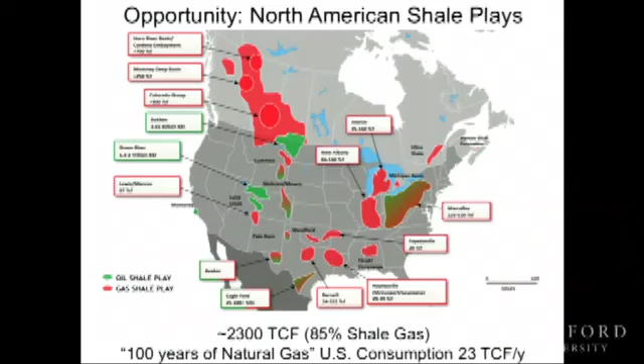And the technology to extract this gas from these extremely low permeability formations, which I'll talk about later, is now being applied to low-quality oil reservoirs. So where these areas are shaded green, it means not natural gas being extracted from shale, but actually gas and oil, or just oil. So this technology, which I'm about to tell you about, has sort of revolutionized the energy picture in North America by making a known source of energy available to us in extremely large quantities.

And it's truly daunting that in the next decade or so, tens of thousands of wells are likely to be drilled, maybe 1 million hydrofracks carried out. And so it's really pressing to address two major questions. One is, how do we optimize the development of this resource in the most intelligent way possible? And how do we minimize the environmental impact?

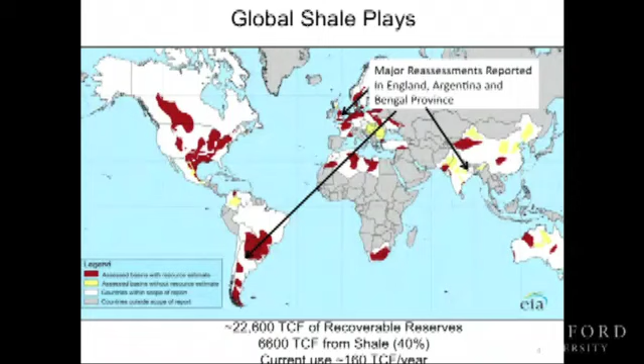Now, this is not just happening in the United States. Last spring, the Department of Energy released a global assessment. There were many areas shown in gray for which there was no data available, but from the areas where data was available, there was something like 100 plus years of natural gas globally. The fraction of it coming from shale is less because of the large conventional gas deposits in the Middle East and Russia, but nonetheless, the resources are enormous.

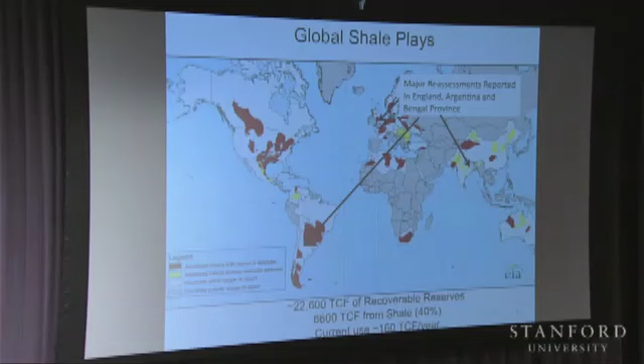And no sooner had this report been published than major new assessments came out in Argentina, the UK, and even in Bengal province in India. So it's really having a big impact.

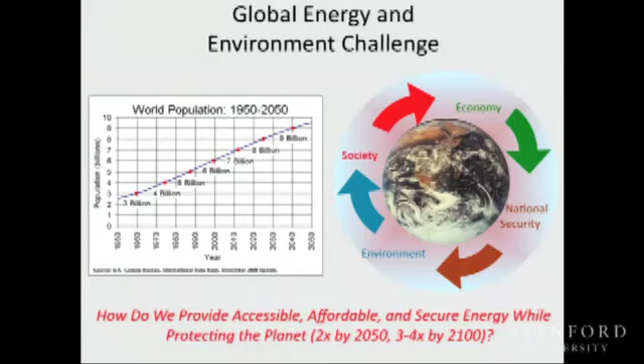Now, this is a slide I borrowed from Sally, and I like to show it to scare students. So the first way I scare them is by mid-century, when they are about the age that I am now - that kind of frightens them - the challenge is not only to address the energy and environment issue that many of us are struggling with every day, but to do that in a context that allows us to provide roughly twice as much energy as we currently use.

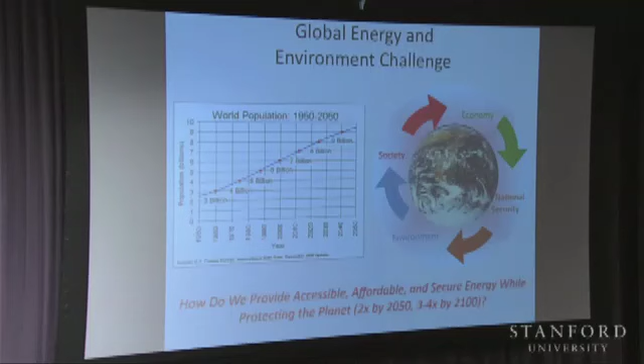So not only do we have to address this issue of economy, national security, environment, and society - we're all very familiar with the complex interaction of these many questions - we have to increase the amount of energy that's available to sustain the growing economies of the world's population. It's truly a formidable challenge.

Now, natural gas has a few really large advantages over conventional fossil fuels. And the most important thing, I think, is to compare natural gas with coal, because the opportunity to replace coal with natural gas for electrical power generation is right before us. This is low-hanging fruit, and we literally can cut our CO2 emissions coming from burning coal in half. That's what this slide from the DOE shows, that the CO2 emissions are approximately 50%.

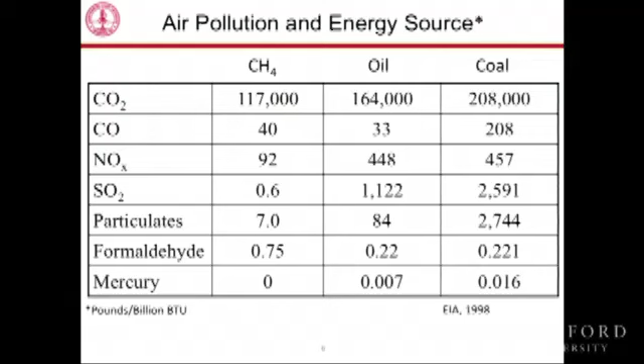And of course, things like particulates, mercury, sulfur and nitrogen oxides - natural gas is a far cleaner fuel than coal. In fact, the only reason we use coal at all is because it appears to be cheap and abundant. And now we have a logical alternative.

Burt Richter showed this slide last week, and it has to do with the life cycle analysis, the full cycle of using natural gas as a fuel. This study, which is about 10 years old now, does show that the life cycle analysis for natural gas emits half as much CO2 as coal. Now, there's been some question about the life cycle analysis, and there are open issues, but the Department of Energy and a number of other responsible studies are coming down more or less at this picture that we emit about half as much CO2 as using coal.

So as I have become more and more enthusiastic about natural gas and have worked on it more and more over the past few years, it's not that I'm trying to maintain the era of fossil fuel. We have to decarbonize our energy system. There's simply no question about it.

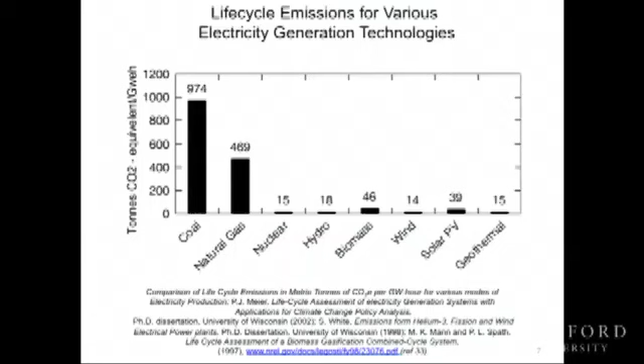Natural gas provides a wonderful bridge between now and, say, 2050, by the time we have a large enough portfolio of renewables and alternatives to completely get away from fossil fuels, far more so than we can today. So I see natural gas as the bridge fuel to a decarbonized future, not as a way of sustaining business as usual.

In its 2009 report, America's Energy Future, the National Academy did a cost analysis for making electricity with different forms of energy. When they used the low price of natural gas, which was $6 per million BTU—twice its current price—natural gas was cheaper than coal. So there's really no economic impediment. It's cheaper today to use natural gas.

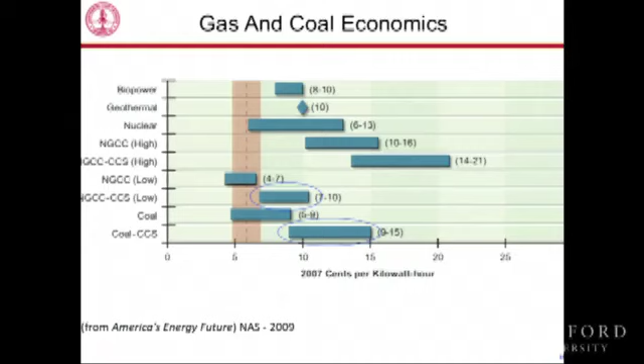In fact, the current price of natural gas is so cheap that companies can hardly drill and produce it profitably. So natural gas beats coal, and it beats coal even more once we consider the cost of carbon capture and storage. This cost, especially for coal, keeps creeping up, and the differential is growing, and you're generating half as much CO2 to begin with.

So let me talk about the technology that's made all of this possible. This slide shows both the total gas production and the number of wells drilled in the Barnett Shale, which is the Fort Worth Basin, the Dallas-Fort Worth area of north central Texas. A very stubborn oil man named George Mitchell kept at it for years and years, and he and his company finally unlocked the methodology to get the gas out.

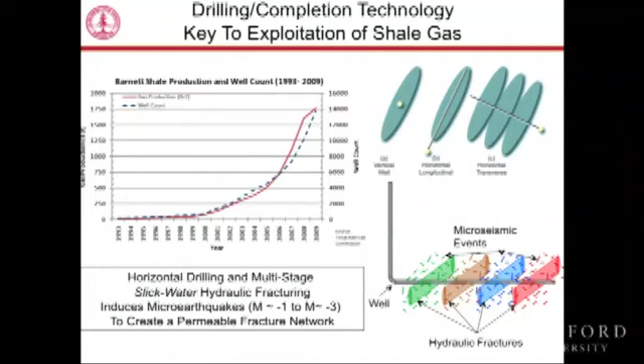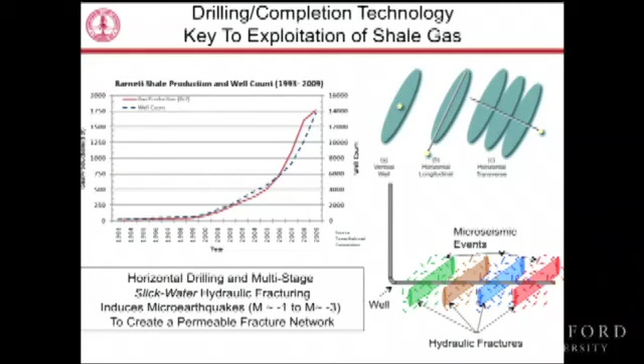Originally they were drilling vertical wells and making large hydraulic fractures, which is good—the hydraulic fracture is a permeable conduit in contact over a large area with relatively impermeable rock, and production was increased. Then horizontal drilling came along, and they would drill a long well in the direction of the maximum compressive stress in the earth, creating a long hydraulic fracture. That was better, but still they weren't producing commercial quantities of gas.

Then they turned the direction of the well and drilled in the direction of the minimum horizontal compression in the earth, starting a succession of hydraulic fractures along the length of the well. This is really a big part of the secret—they were able to dramatically increase the permeability of the shale and produce gas in quantities that were economically significant.

There's another subtle difference in the technology: they began to use essentially clear water to do the hydraulic fracturing. Hydraulic fracturing has been around for about 60 years, and traditionally they'd use a very complex gel with very high viscosity in order to carry sand as far from the well as possible to prop open this fracture, allowing the area of contact to be large and a very permeable fracture plane to exist for gas to flow into the well.

With slick water—called that because a little friction reducer is added along with some biocide and a very little thickening agent—what's actually happening, by design or by happenstance depending on who you ask, is that the permeability of the shales, while low, is enhanced by pre-existing natural fractures.

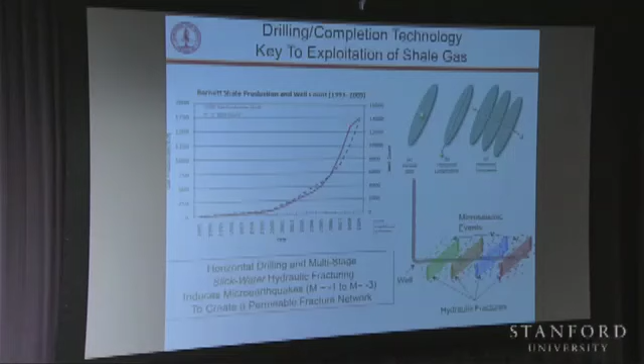At the time we got involved in this, about 4 or 5 years ago, they were drilling thousands of wells per year—about ten hydrofracks each, tens of thousands of these hydrofracks—and the companies were going as fast as they could. Gas prices were high, operations were profitable, and they were out drilling and operating mostly in the Barnett Shale as fast as they could.

At a conference of the engineers charged with this task, the Society of Petroleum Engineers, when asked 'I am confident that I understand reservoir drainage,' 80% said no, not confident. Asked 'I am confident in our estimated ultimate recovery,' 80% said no, not confident. Asked 'I think new completion technology is needed,' 85% said yes.

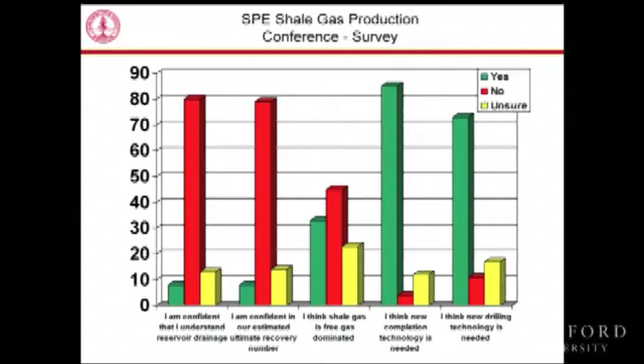So in the middle of this rush to develop the resource using standard technology, which was profitable, the people involved freely admitted that they didn't understand what they were doing as much as they would like in order to optimize the resource and reduce the environmental impact. My students and I have been engaged in addressing both of those problems for the last 4 or 5 years, and now I want to talk about some of the research we're doing.

So a little bit about the rock properties. These shales are markedly different from basin to basin, and sometimes different within the basin. So how do the rocks themselves affect the success? What's the importance of aseismic deformation?

In other words, I showed you these little micro-earthquakes. By the way, those micro-earthquakes release as much energy as a gallon of milk falling off a kitchen counter. These are very, very small events—magnitude -2, -3 events. It's a fault patch about this big. It slips less than 1/10 of a millimeter. Very, very small events. What we're beginning to suspect is that faults are actually moving slowly and quietly during this process and enhancing the reservoir permeability.

What factors affect ultimate recovery? In other words, how do we drill fewer wells and get more gas? And how do we minimize the environmental impact?

So this is a typical kind of operation. This is the Barnett Shale. These are 5 horizontal wells, each about 4,500 feet long, 500 feet apart. Each well was hydraulically fractured 8 times along its length. The dots represent the microearthquakes that we recorded during the fracturing process.

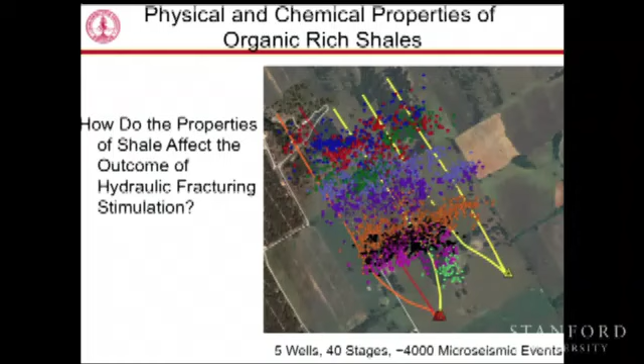The first question is, how do the properties of the shale affect the outcome? You can see from the microearthquakes alone that even though the fracturing was done very regularly and very similarly, there are areas where there are hardly any microearthquakes and other areas where there are quite a few. So apparently, by doing the same thing, the shale responded quite differently. Why is that, and how does it affect productivity?

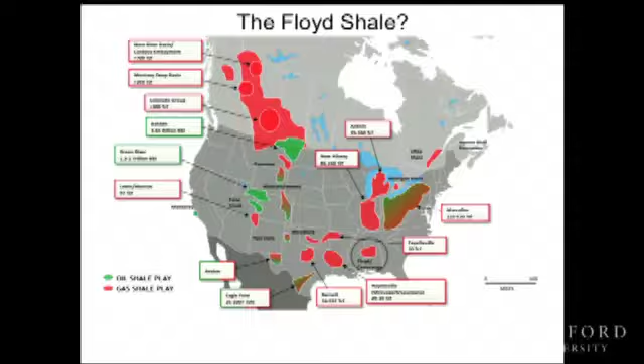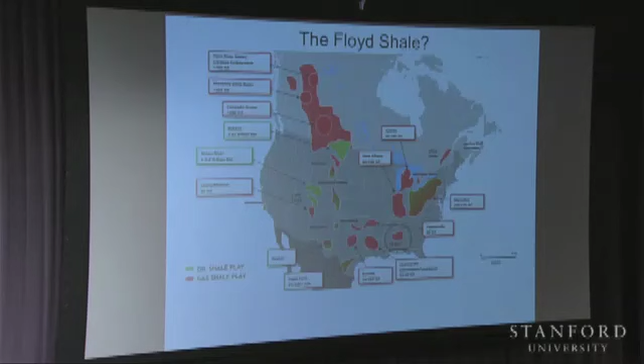I might also point out that while the Barnett Shale has been extremely successful, the Haynesville Shale, the Eagleford Shale, the Marcellus here in the Northeast—all of these shales have been great successes in the sense that companies are employing this technology, producing commercial quantities of gas. One place, the Floyd Shale, has been kind of a bust. They drilled wells, carried out hydraulic fracturing, and it was completely unsuccessful. So keep that in mind.

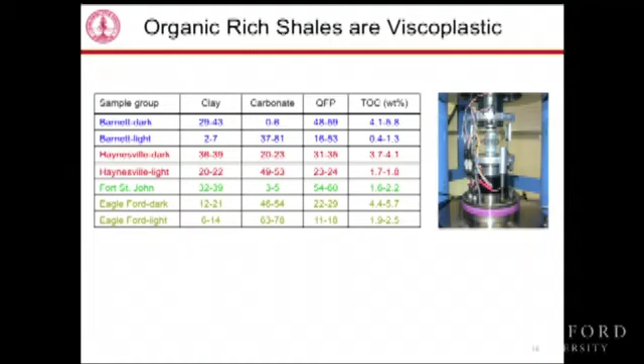Now, we're working with organic rich shales in our lab from many different places. We sort of subdivide them into high clay, which we call dark samples, or low clay, light samples. So the Barnett, the Haynesville, which is Louisiana and East Texas. Fort St. John is in Canada. The Eagle Ford is South Texas.

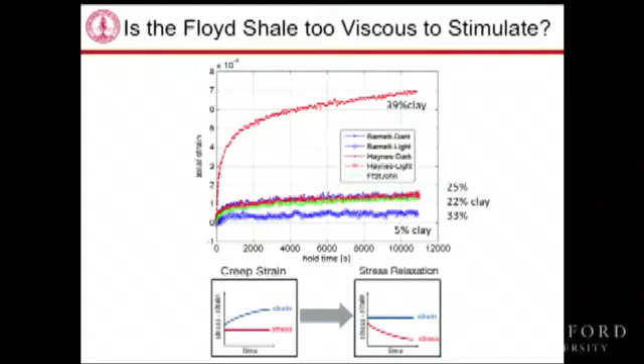This is the work of Hiroki Sone, one of my students, and one thing Hiroki has been doing is studying how the samples creep. In other words, when you apply a force to them, they behave semi-elastically, but they keep deforming as a function of time—viscoplastic creep.

One thing that affects the creep is the amount of clay. These samples all have a lot of clay, but when the clay gets up to about 40%, there's so much clay that the clay is actually supporting the applied load, and the creep is greatly accelerated. You can see here, this 39% clay sample is creeping—it's deforming as a function of time under a constant load far more than the other samples.

What happens when a sample has this behavior of creep with time is that the stresses relax with time. In other words, the stresses just sort of flow away over time. So the rock is not brittle and is not amenable either to hydraulic fracturing or to stimulating slip on these pre-existing faults. So a large amount of clay is really a bad thing for actually employing this technology.

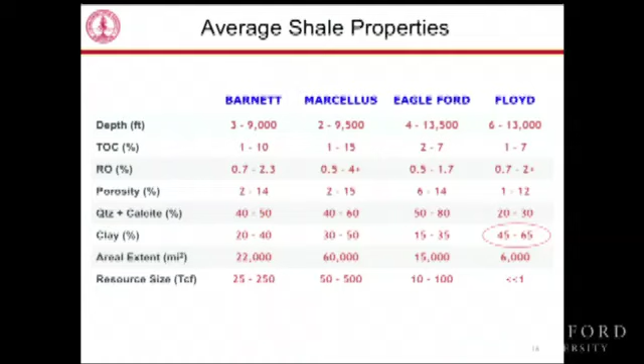When you compare a lot of these shale basins, the Floyd stands out because of the very large volume of clay. So as we look at this resource on a global basis, we have to remember that we're not going to be able to simply do what we did in the Barnett and have it succeed in the same way. Methodologies will have to be developed and adapted for the geologic conditions that exist in these different places.

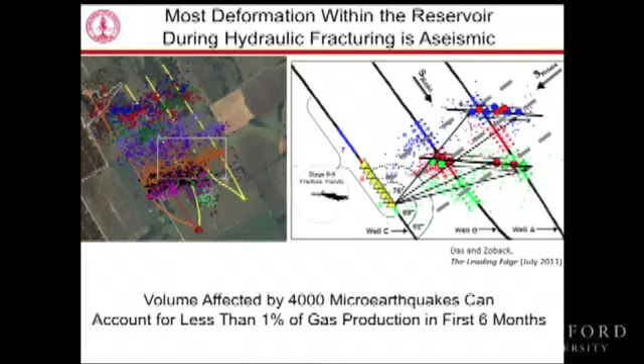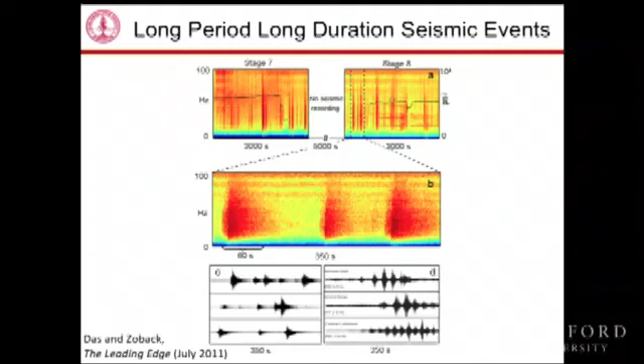So something else has to be going on during the stimulation process. My student Indrajit Das and I have been looking at very strange seismic signals coming from the areas that are being stimulated hydraulically, which we interpret to be slow slip on faults. When you look at the seismograms that we are recording during these operations, they look a lot like a phenomenon known as episodic tremor and slip, which is observed on deep subduction zones and the San Andreas Fault at great depth. When these things are observed by earthquake seismologists, they are interpreted to be slow slip on faults, and we are seeing the exact same thing in the Barnett Shale when it's being hydraulically stimulated.

Now we're trying to understand how this all fits together, and this is a model developed by Mark McClure, a student who's working with me, and Professor Roland Horne in the ERE department. What Mark has done here is he's developed a computer model of what's going on in that group of wells that I showed. There's the middle well.

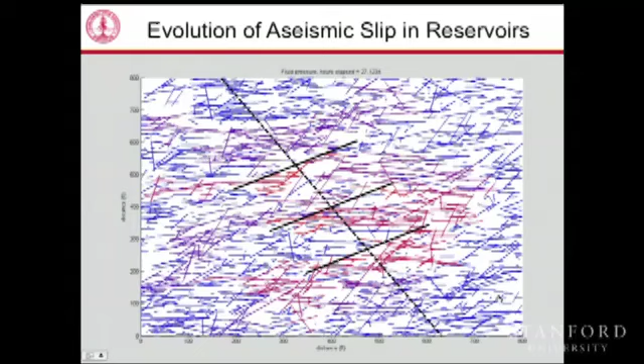There are several of the hydrofracs, and all those blue lines represent the natural fractures that exist in the formation before anything is done. They're just naturally existing. They were studied by a certain type of imaging tool that was run in the well. So the orientation data, the density is well constrained, but they've been extrapolated mathematically through the volume.

And then these wells are hydraulically fractured, and as the fractures turn from blue to red, that means that what happened is the fluid penetrated the fractures, the fractures slipped, the fractures increased their permeability, and now what you see is that the area of contact between the hydraulic fracture and this very low permeability shale is greatly enhanced by all this fault slippage.

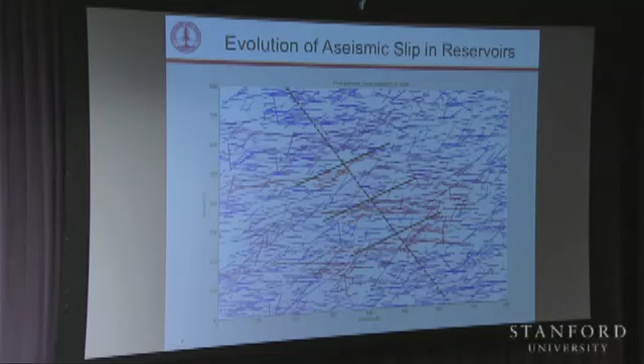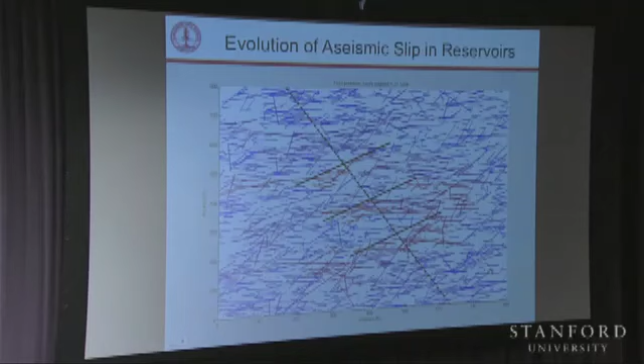And you can see that there are areas where there's been a lot of fault slippage and a lot of permeability enhancement, and other areas that are hardly touched at all. This kind of modeling could actually be done before the hydraulic fracturing is done, and you could optimize what you do depending on the conditions rather than going out and doing everything the same in every well, as is commonly the case.

Now one of the big questions is how much gas is going to be coming out of these wells over time. Of course, the way petroleum engineers deal with this is they build mathematical models, they compare them to known fields to test those models, and the more they can test their models, the better they can make predictions. The problem here, of course, is that these wells have been under production for such a short period of time that we don't have much of a historical precedent to calibrate models.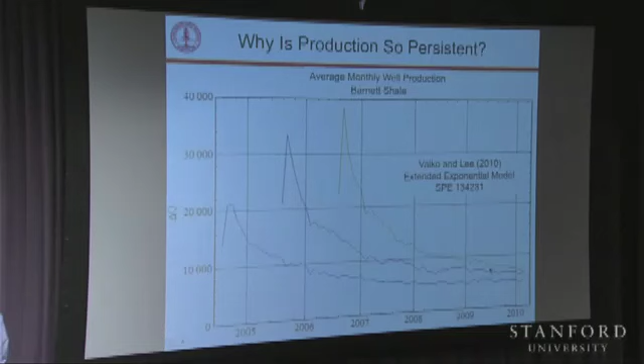We'll see. Now, one reason it's complicated and hard to know whether such claims are valid is that what's happening at very fine scales within the shales is very poorly known, and we're just beginning to get an inkling of the pore structure.

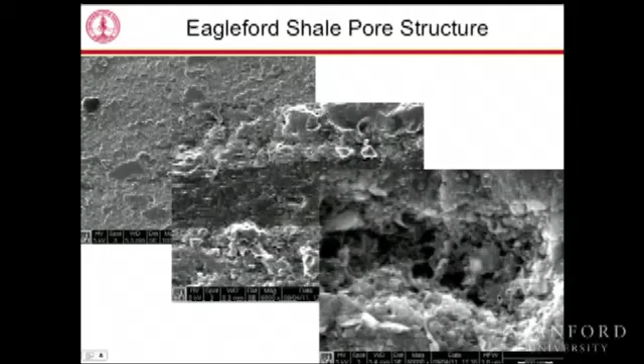Very, very small pores. And this is where the gas is originating. The question of how the gas actually gets out of the shale is a very good one, and we're just beginning to understand it.

My student Arjun Kohli, who made these photomicrographs, has just returned from Poland, and I want to show you some really cool images he just brought back over the weekend.

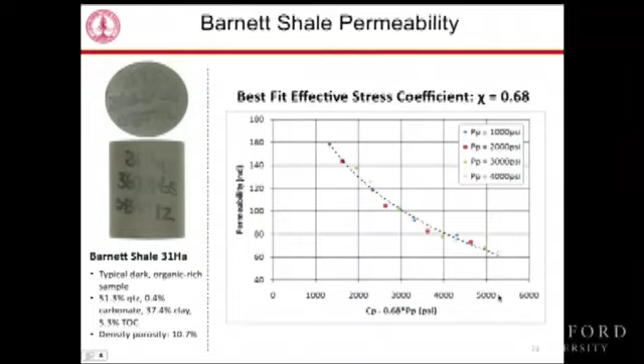Now, I've said repeatedly that the permeability of these shales is very low, or very, very low. This shows permeability as a function of the pressure that's acting on the shales, and they start about 140, 150 nanodarcies, and as the pressure increases, the permeability drops by about a factor of 2.

So what do these numbers mean? Well, 100 nanodarcies is 1,000,000 times smaller than a conventional gas reservoir. So if we think about the gas industry, drilling wells, producing gas as it has for 100 or more years, 100 millidarcies is kind of an average number for a permeability. So we're trying to produce gas from a material that's 1,000,000 times less permeable than a conventional reservoir.

And that's the challenge. That's why this horizontal drilling, multi-stage fracturing is needed. And that's why the mystery of how this fluid flow occurs is so profound.

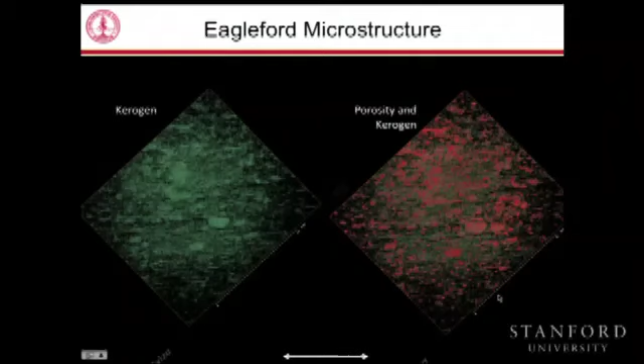Now these are, it's a little hard to see with this bright light. If the lights could be dimmed, thank you. So these are nano CT scans. The scale over here is about 0.5 millimeter. And what you're seeing is the bedding planes from left to right.

And what's shown in green on the left is the kerogen, which is distributed through the sample. And in red is the porosity, and they're superimposed. You can see the similarity between the green and the red. In other words, the pores are in the kerogen.

And somehow at this nano scale, this has all got to link up in order for the gas to flow out of the kerogen through microcracks into larger scale fractures and so on, and actually make its way out of the samples. And we don't exactly know how that happens, and it could well be different in every one of these shale basins that I showed you about.

In addition, when we start to talk about flow at these nano scales, it's not the kind of flow we're used to talking about. Petroleum engineers, hydrologists talk about Darcy flow. You apply a pressure gradient and the fluid will flow with a certain rate according to the permeability. Okay, very simple, very well understood.

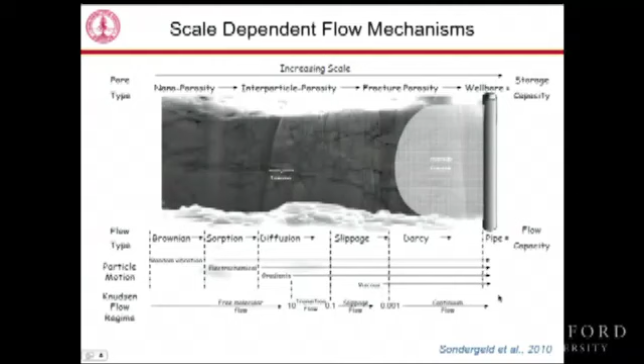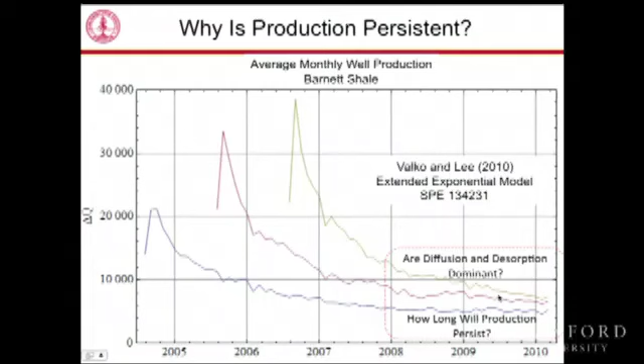But as we get to these smaller and smaller scales, the mechanisms by which flow is occurring is changing, and processes such as diffusion and desorption start to become very, very important. So there's a change in the flow mechanism, and what we're beginning to suspect is what's happening as these curves flatten is that we're starting to see the desorption of gas molecules that are adsorbed to the clay and adsorbed to the organics, desorbing and starting to flow and contributing to the production.

We're trying to model that right now, but even if it is true, we still haven't addressed the question of how long production will persist, and this is the problem we're working on. Despite the fact that this is a resource of global strategic importance, despite the fact that we have a basic methodology that works, there are hundreds of fundamental questions we still don't understand, and it's going to take years for scientists and engineers around the world to optimize resource development.

Recovering 25% of the natural gas, which is more or less the metric today, is really criminal, leaving 75% of the gas behind. If you could have the same number of wells, exert the same effort, and get half the gas, you'd be doing twice as good. So it's really important to have a better understanding and to optimize recovery. At the same time, everyone is very aware of all the environmental issues that have arisen with shale gas development.

There have been cases in which surface contamination has occurred due to spills or other practices around well sites. There's been gas leakage from wells that has been quite serious. There are issues associated with disposal of flowback waters. After you make the hydrofracks, inject all this water, you flow back the water. You basically inject clean water with relatively few chemicals, but what comes back is highly saline, has arsenic, selenium, iron in it, so you have to do something with this flowback water.

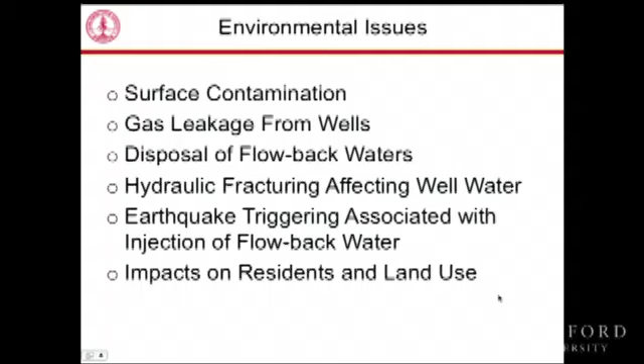And all of this is summarized by 'no fracking.' I really hate the word fracking, but that's just my... The issue is not what words are used, but if you misidentify the problem, you misidentify the solutions. There are real problems, and they have real solutions, and we have to work to find these solutions and apply them to minimize the environmental impact. Just saying no fracking does a disservice to what the challenge really is.

The DOE committee that Sally referred to has issued two 90-day reports. We're finished with our task. This was the first, and the second report came out in November. The committee was chaired by John Deutsch. There were seven of us, and it was a highly diverse committee. Dan Yergin is known to many of you as an energy analyst, who just completed the book The Quest. Steve Holditch is chairman of petroleum engineering at Texas A&M, and Fred Krupp is president of the Environmental Defense Fund. We came at this with many different perspectives, and we came up with 20 recommendations about which we all strongly agreed. That's what I want to talk to you about.

Our charge, delivered by Secretary Chu, came from the president's energy position last March. Our charge was to develop, within 6 months, consensus recommended advice to the agencies on practices for shale gas extraction to ensure the protection of public health and the environment.

In this 6-month period, we looked at the entirety of the issues surrounding shale gas. We affirmed that it was in fact extremely important to the energy security of the country, that natural gas from shale now accounts for over 30% of total natural gas production. It's generally had a very large positive economic impact on local communities, creates jobs, and it can be developed in an environmentally responsible manner. That doesn't say it's always being developed responsibly, but that it could be. We made these 20 recommendations to go from where we are to where we want to get, which is a development system that really minimizes its environmental impact.

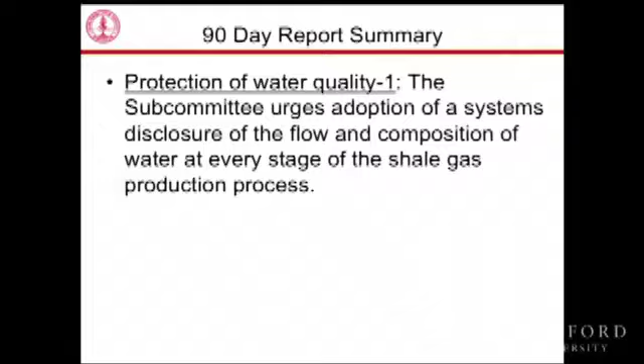What's in the water and what happens to the water. Okay, let's just get rid of all this sort of secrecy.

With respect to hydraulic fracturing, the basic concern is that the hydraulic fracturing that typically occurs at depths averaging about 7,000 feet is that the hydrofracks are going to grow up and affect the water that's being used by near-surface wells. That's the public's concern.

In fact, in nearly all shale gas plays, there is really no issue. Now, if the shale gas is being developed at a very shallow depth, what I'm about to say is not relevant. If the shale is at a very shallow depth and very close to water supplies, you need to be extremely careful, and it may be impossible to develop shale gas resources because of the potential for contamination in some places. But in the places I've been talking about, there's really a tremendous separation between the depth of the shales and the depth of water supplies.

This and the graph that follows basically make that point. This is the Barnett Shale, and it's basically a plot where along the x-axis, the depth of the shale is ordered by increasing depth. So the wells throughout the basin are resorted so that on the right we see the Barnett Shale at its shallowest depth, about 4,700 feet, typical depths 6,000 to 7,000 feet, and at the very deepest, the Barnett Shale gets about 8,500 feet within the Fort Worth Basin.

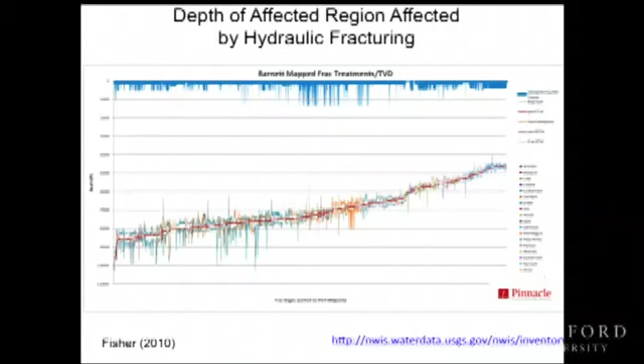In fact, the problem in the Barnett is that sometimes the hydraulic fractures grow down into what's called the Ellenberger, which is a big saline aquifer, and the operators inadvertently turn a gas well into a salt water well. So this is the big problem.

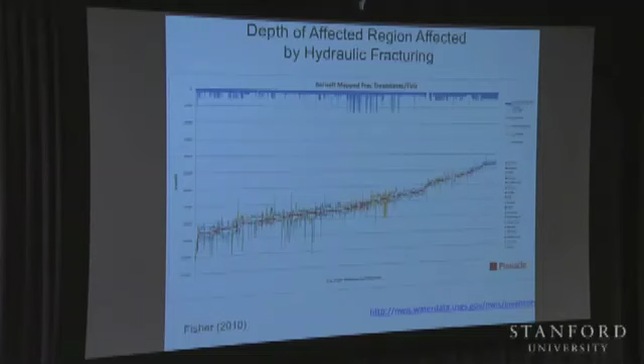So do you get vertical growth? Yes. Vertical growth is actually a bad thing. Operators try to reduce it because you obviously want to stimulate the permeability in the Barnett, not the overlying or underlying formations. But there's no evidence whatsoever that there's any vertical fracture growth anywhere close to the aquifers, nor has there ever been a documented case in which hydraulic fracturing itself has affected a water supply.

This is the Marcellus in the northeast, far fewer data points. There were something like 2,000 wells in the previous graph; there's a couple hundred here. The problem here is that there's a lot of vertical growth of the fractures, which is a waste of energy, a waste of money. But again, we have at least 3,000 or 4,000 feet between the shallowest microseismic event and the deepest well. And again, there's never been a documented case in which hydraulic fracturing fluid has reached an aquifer.

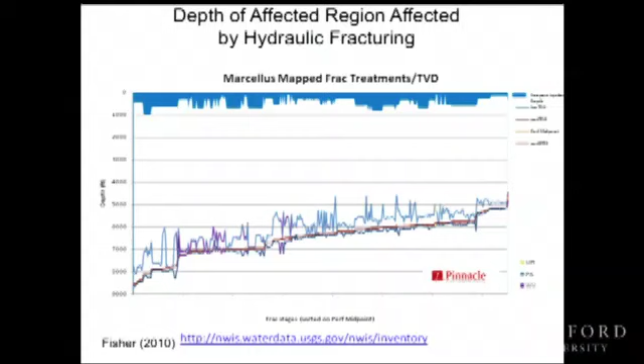So as long as the shale is deep, things are okay. But as I said before, if the shales were very shallow, you might not be able to develop the shale because of the potential for surface contamination, and that would be the end of the story.

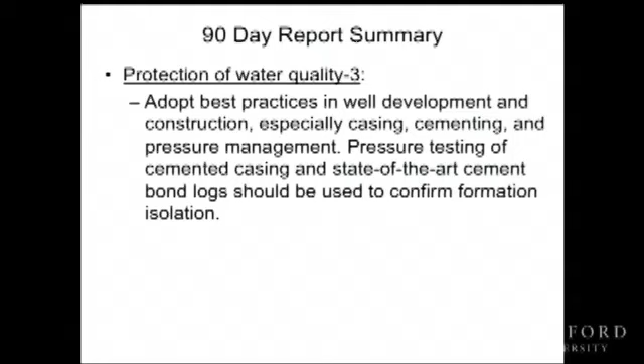What the real issue is with protecting water quality is well construction. And doing a good job of drilling the well, casing the well, cementing the well, testing the cementing, fixing badly cemented wells before you proceed. A badly cased and cemented well can leak gas whether you hydraulically fracture it or not. This is very mundane, but this is the heart of the issue, especially with low gas prices, where there are lots of incentives for operators to go as fast as they can and try to cut corners.

Now, this is from a paper by George King. George King is a petroleum engineer who works for the Apache Corporation. He's literally done thousands of hydraulic fractures, and it's sort of a long paper that he's written on various aspects of the problem. He recognizes it and states the situation extremely clearly. So here's a vertical well drilling through various strata, turning horizontally in the shale. The question is, where do you set the steel casing and where do you put the cement?

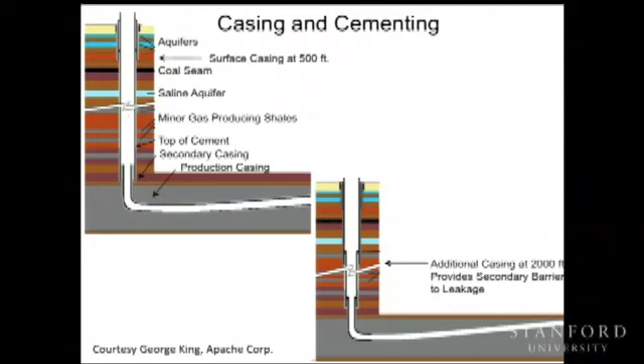Economically, you want to set as little casing and do as little cementing as possible. But if you've cemented casing up here and not cemented the section of casing there, if you've got a coal seam or minor gas production from the shales, the only protection from this gas leaking out is the cement behind this casing, near the surface. So there's a single barrier, and any mistake up here will allow the gas to leak out.

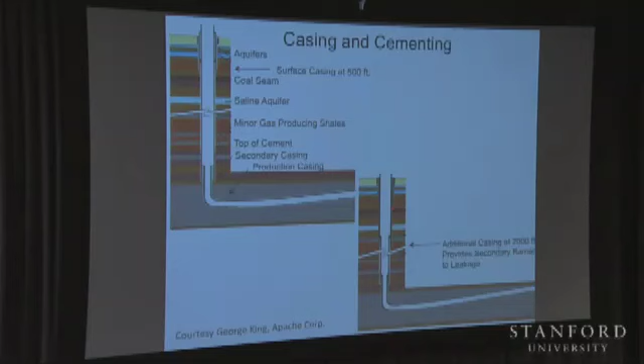What George points out is that depending on the local geology, it would have been much better to put deeper casing and more cement and seal off with multiple barriers some of these other gas-producing horizons. If these wells are going to last 25 or 30 years, they can't leak for that long. The money has to be spent to do it right, and regulators have to know how to do it right and insist that it is done right from the beginning.

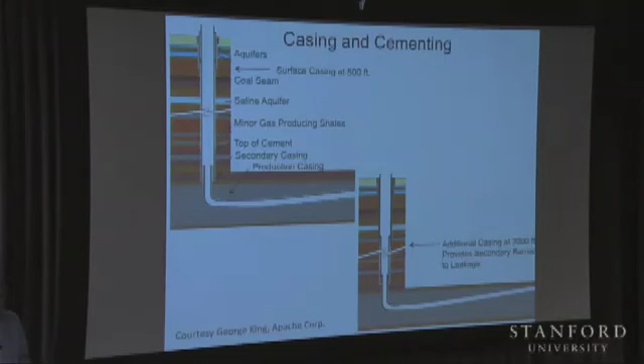So the three keys to really protecting the water system, to really ensuring the integrity of these wells for the next 30 years, are well construction, well construction, and well construction adapted to the local geology.

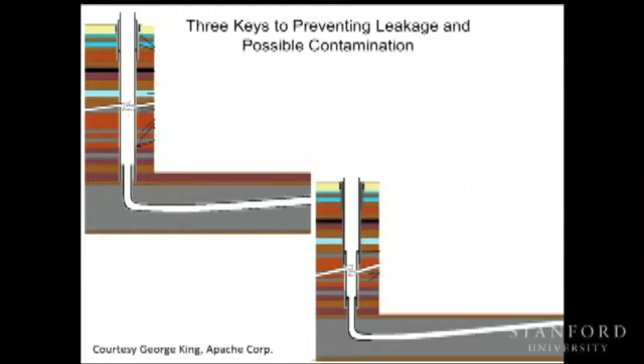So well construction, and match best practice and regulation to the local geologic conditions.

The water issues are really complicated depending on where you are. If you're in South Texas, just getting fresh water after last summer's big drought is a big problem. If you're in the Marcellus, having a place to dispose of the water is a big problem. If you're in Horn River, northern British Columbia, there's no infrastructure at all — you're really in a very remote frontier area.

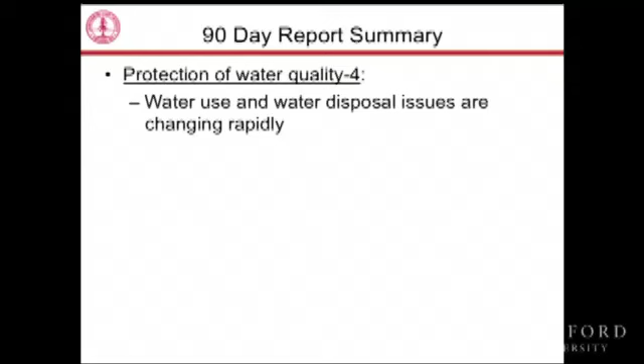And these issues are changing rapidly. Three years ago in Western Pennsylvania, if you told operators they had to recycle the water used for hydraulic fracturing, they'd have told you you were crazy — they couldn't operate this way, couldn't make any money, it was too difficult and complicated. Every one of them is doing it today. There's no alternative. So from an economic and an environmental point of view, the smart thing to do is recycle the water, and that's what they're doing.

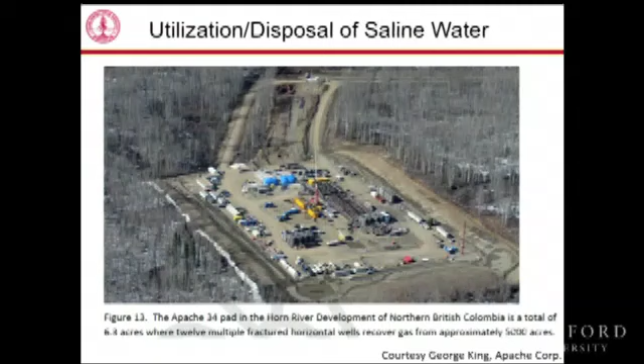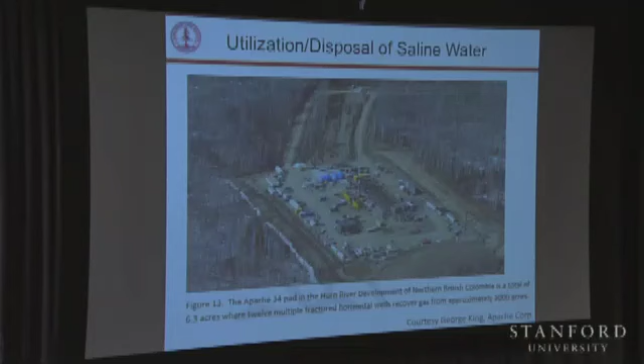This is another slide from George King. This is Horn River — they're drilling on this pad, 12 wells, with something like 150 hydrofracks. There are basically no wells, no source of water. So they drilled 4 wells into a saline aquifer, used saline water for hydraulic fracturing, and put the flowback water back into these saline formations, and everything was fine. Not an ounce of fresh water, no salt water disposal. So the systems that have been used, which have been very water intensive and created this big disposal problem, are not written in stone — there are modifications to standard operations all the time that can improve things.

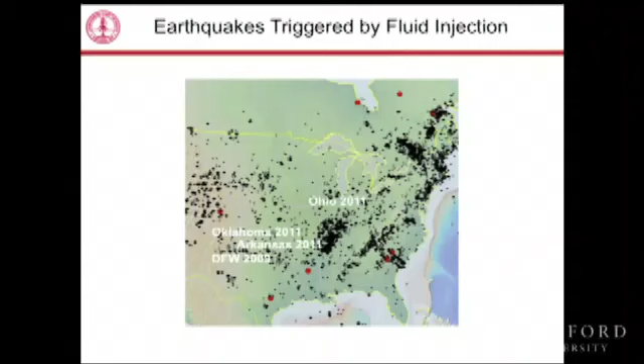One of the big issues of the last couple of years has been earthquakes triggered by fluid injection. In 2009, there were a series of earthquakes near the Dallas-Fort Worth airport. Last spring, there were some earthquakes in Arkansas, which I'll talk more about in a moment. There's been a big increase in seismicity in the last couple of years in Oklahoma. And on Christmas Eve and New Year's Eve, there were earthquakes associated with an injection well near Youngstown, Ohio. So still one more environmental problem associated with shale gas development.

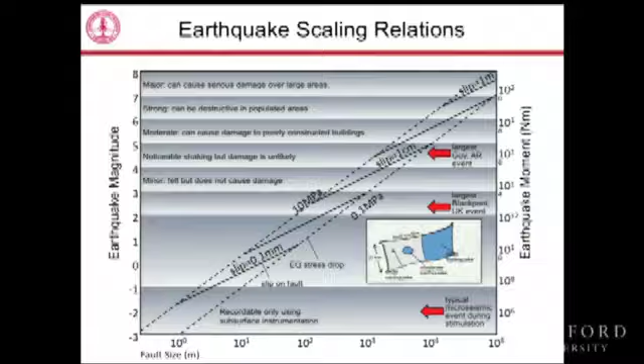It's important to keep the scale of the problem in mind. This is a plot a student helped me make. Earthquake magnitude is shown here, the size of the fault that slips, and the amount of slip on the fault shown by these lines, and the stress drop — how much stress is relieved in the earthquake — is between these two dashed lines. So what does this mean? It means these little tiny microseismic events, magnitude -2, on a fault less than 1 meter in size, slip less than 1/10 of a millimeter. These are the firecrackers I talked about before — they're hardly worth noting.

During hydraulic fracturing in England, a magnitude 2.3 earthquake occurred. This has a scale on the order of 100 meters or so, and the slip is on the order of about 1 millimeter—still pretty darn small. A magnitude 2.3 earthquake would rarely be felt at the surface.

So most of the events we're talking about are extremely small and pose no hazard. By the time you get to an event the size of the one that happened in Arkansas, a 4.7, you're talking about a more sizable event, one that's felt over a large area, affecting a fault several kilometers in size and producing a slip of a centimeter or several centimeters. So you really want to prevent this. It's a nuisance of little consequence, and this is hardly worth talking about, but we really don't want this to happen at all. You don't want injection to induce earthquakes at any scale, whether hydraulically fracturing or disposing of fluid.

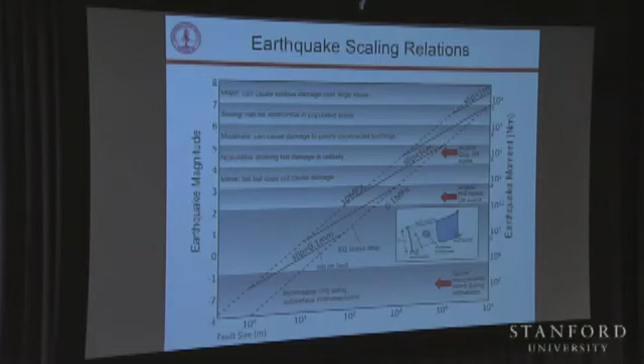And that's a hard thing to do, because for most of my career, looking at seismicity in intraplate areas and thinking about the stress field there, it's become abundantly clear that in most places, even in intraplate areas far from plate boundaries, the Earth's crust is in a state of being critically stressed. In other words, the forces are high and pre-existing faults are close to failure.

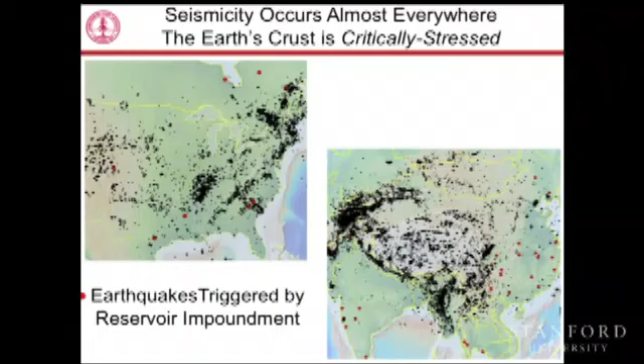But nonetheless, when dams are built and surface reservoirs are impounded and the water pressure at depth changes by just a little bit, you sometimes get reservoir-triggered earthquakes—that's what's shown in these red dots. So even in really stable places like the Canadian Shield, you get magnitude 4.5 earthquakes triggered by impounding reservoirs. Eastern China, which has few earthquakes in general but has had some very large historical earthquakes, has had a number of places where reservoir impoundment has triggered earthquakes, and in India as well.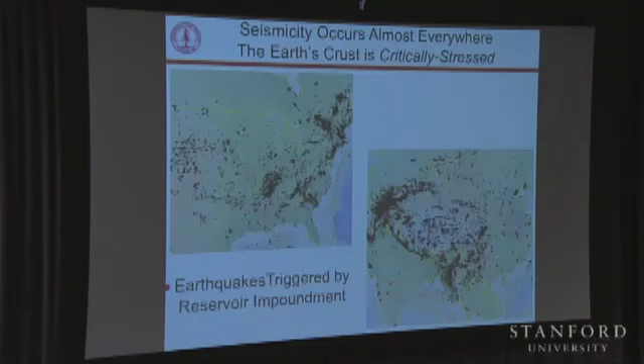Very stable in general, but the faults are at this kind of point of near failure, and if you increase the fluid pressure through injection, you basically change the normal stress and allow naturally occurring earthquakes to actually occur sooner. These earthquakes would have occurred anyway at some point in geologic time, but the injection process advances the clock.

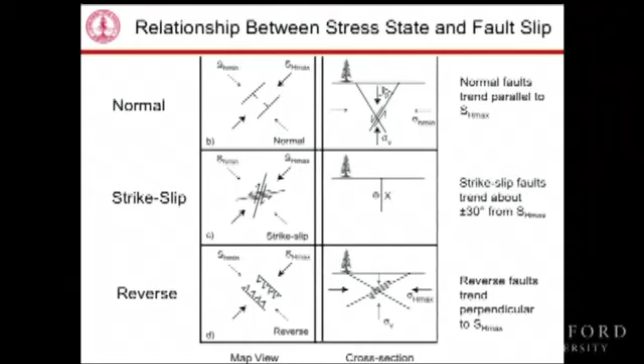Now, for those of you who are not geologists, this looks a little complicated. For those who are, you saw this in your freshman or sophomore year. But basically, there are different styles of faulting in the Earth's crust, and there are predictable relationships between the forces in the Earth and the orientation of the faults. I want to talk about this situation right here, what's called strike-slip faulting.

If you know the force, then you expect faults to slip that are more or less vertical and strike about 30 degrees from the direction of the maximum compressive stress. The reason I'm showing you that is that this is exactly what we see in Arkansas.

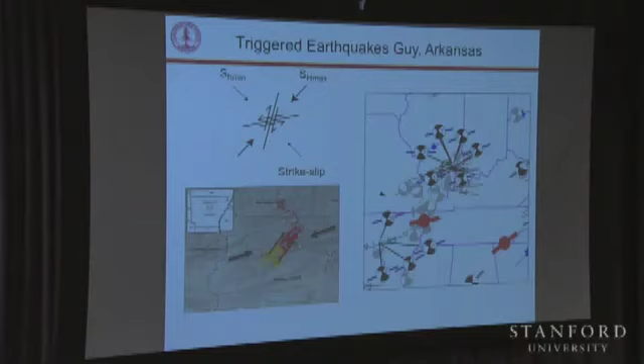So there was shale gas development. The flowback water was taken to an injection well. The injection well was located right there. They started injecting, and small earthquakes started to occur. Those earthquakes started to line up along a fault that is at exactly the right orientation for strike-slip faulting to occur.

So it would have been known immediately, if there was a local seismic network, that not only were the earthquakes occurring, but they were lining up along a geologic fault that had just the expected orientation for the regional stress field, which is very well defined by data just off to the west of this map. This location is just right about there.

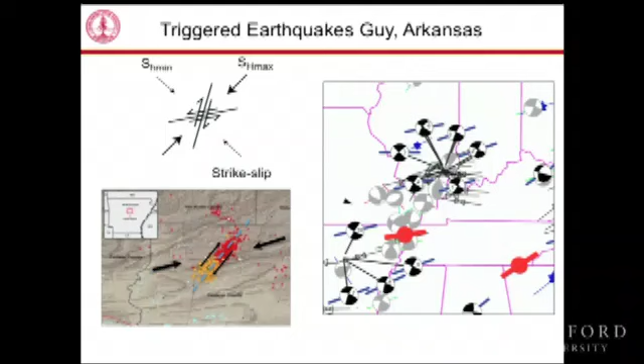So, a textbook, very simple case, but in fact nobody was paying any attention. The issue of triggered seismicity wasn't addressed, and nothing was done until a magnitude 4.7 occurred and came to the governor's attention. Then injection was stopped.

Now, this is a manageable problem. We understand how earthquakes work, and we understand why injection triggers earthquakes. It's really simple, but you have to be proactive and think about these things ahead of time. You have to avoid injection into potentially active faults, and you have to limit injection rates — in other words, limit the pressure increases at depth, especially when the permeability is low.

There are now 100,000 Class 2 injection wells operating around the country — 100,000, with 50-some thousand in Texas alone. And nothing ever happens, mainly because relatively low volumes are injected into very large reservoirs, so the pressure changes are insignificant. But when larger volumes are injected into less permeable rocks, the pressure goes up and you can get triggered seismicity.

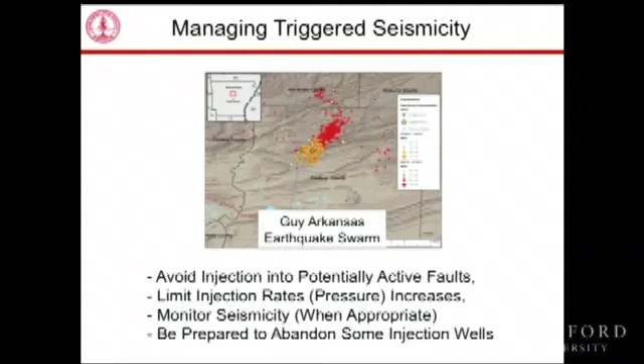You have to monitor the seismicity. If there's any reason for concern, install a local network. Seismologists know how to locate earthquakes in space and time extremely well, so you can immediately know whether something like this is beginning to happen, and then you have to be prepared to stop. There's never been an injection-induced earthquake that's caused injury or fatality.

There's never been one that's caused serious damage. But people are feeling them, and people are concerned about them, and they deserve for their concerns to be addressed. That can be done by being more careful in the site characterization step, by monitoring what's going on, and taking the appropriate action. The regulators have to work with the companies to put all this in place ahead of time so the appropriate actions can be taken.

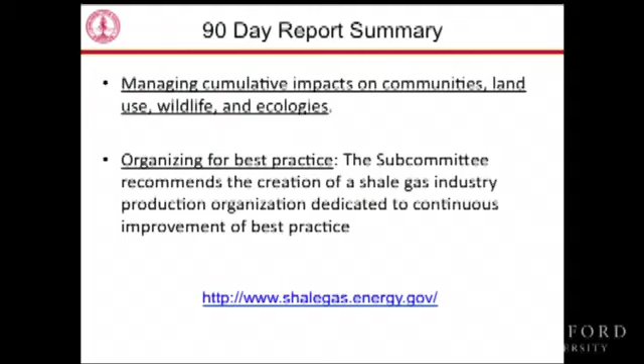Another thing our committee talked about was managing the cumulative impacts on communities, land use, wildlife, and ecologies. This is really falling through the cracks right now, and it's a major issue. As shale gas development proceeds, individual wells are permitted, or a pumping station or a pipeline is permitted, but no one is standing back and looking at all the wells and all of the impacts together. This is a major gap that needs to be addressed, and our committee felt very strongly about this.